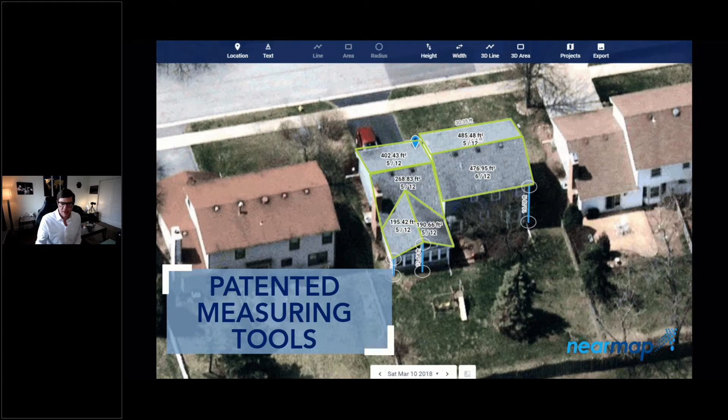Okay, so let's start looking at some content here. So we've got our 2.2-inch ortho imagery, our 3-inch obliques, and then we've got our patented measuring tools on our obliques where you can get measurements accurate to within 6 inches. We've got our 3D textured mesh where you can do things like a viewshed analysis. You can also do emergency response and spatial analysis with that 3D.

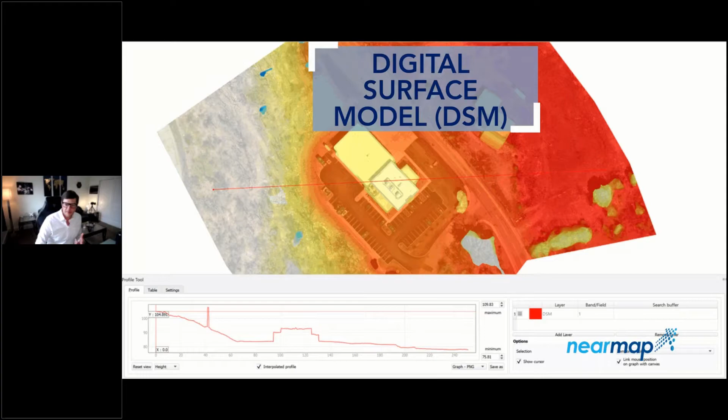And then we've got our digital surface model and our bare earth digital elevation model. And then all these products kind of come together into a great stack where you can do a lot of different analysis with it, including with the AI. And I'm going to go into a lot of that in great detail here coming up.

So really quickly, since we've been looking at a lot of slides, I'm going to show you a really brief video that kind of shows what our map browser interface is like. So this is our web-based mapping application where all of our customers have access to this, and it's a really lightweight application that people can come into if they're unfamiliar with imagery or GIS. They can come in and export images, do easy measurements, see historical imagery, overlay KML files and the like, and then also view our panorama and oblique imagery.

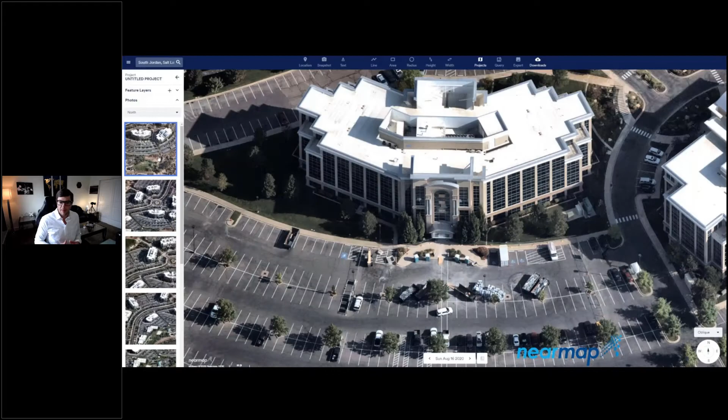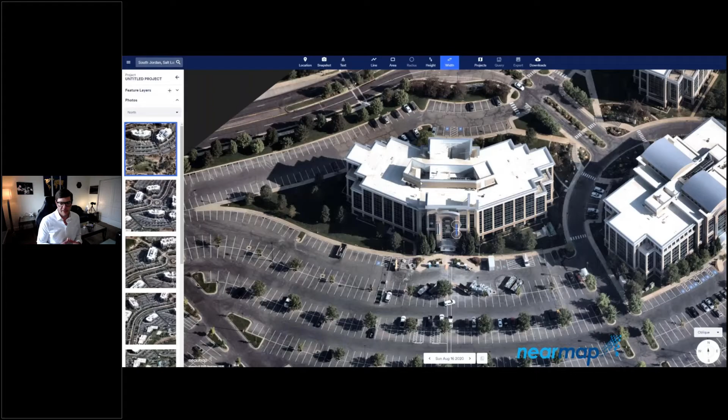And these are the obliques here. So we're switching between all the different images that our camera takes because it operates in a sweeping motion, taking images from 0, 15, 30, and 45 degrees. We make all those images available to the customer so that they can select from different images in the event that there's a tree blocking it or something.

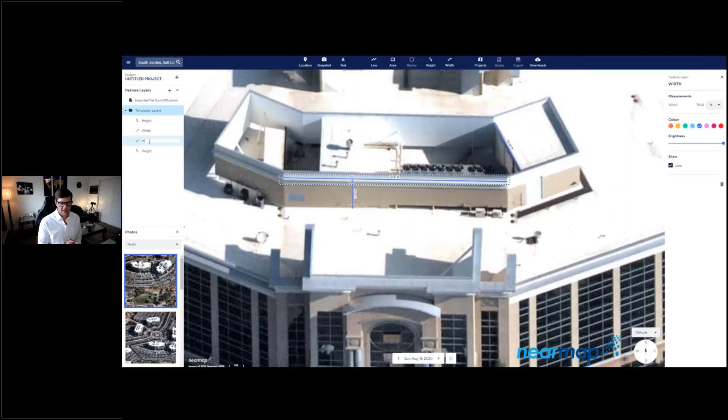You can kind of see around obstacles. And then you can see how close you can get into the imagery and the resolution on it. On the obliques, this is all 3-inch resolution. And these measurements are going to be accurate to within 6 inches on the obliques, and they'll be accurate to within 4.4 inches on the orthos. So very, very accurate imagery with a lot of functionality built into this.

And you've also got our 3D inside of here as well, but I'm not going to show much of that because we will touch on that in a live demo. But the real value of our imagery is when you can bring it into your applications and start using it in the environments that you're used to using it in.

So this is inside of ArcMap, as a lot of you are probably familiar with. We do have a custom timeline add-in right here. You can see that we're cycling between the different dates. And you can access the historical imagery through all of the Esri applications, and really in any application that supports WMS, which is most applications at this point. And our new WMS has the ability to geofence areas and provide historical imagery, as well as deliver the imagery in NAD83 state plane coordinate system.

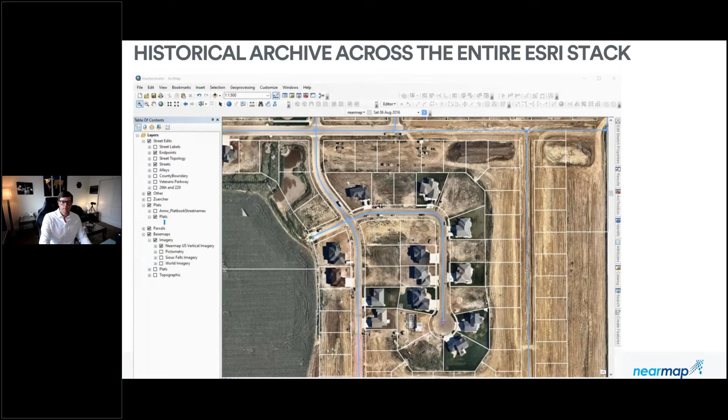We also integrate a lot of our other content with Esri, including our obliques. We have an oblique widget that we developed for Esri that's an add-on that you can put into your organization where you can access the measurable obliques inside a web app builder. This is a view of our ortho imagery inside a web app builder. This is a City of Sioux Falls public-facing application. It's another shot of City of Sioux Falls public-facing application. So we have the options for local governments to display our imagery to the public, and we also offer offline copies as well.

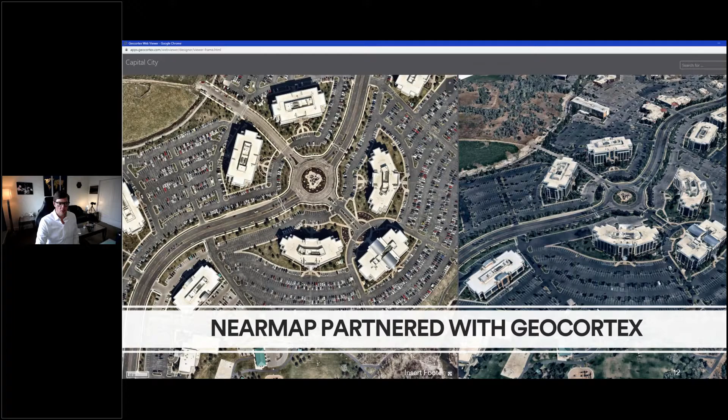This is our imagery 2D and 3D view inside of GeoCortex. So we partner with a lot of different vendors, and some of those are specific to local government, like CityWorks, GeoCortex, VUEWorks, and many others as well. So here's another shot of VUEWorks. This is another custom integration that we have with them. And again, this is Sioux Falls.

Now, we also have a partnership that we're doing with Esri for their ArcGIS Urban product. So cities that sign up for ArcGIS Urban have an option to also get some Nearmap 3D with that. And ArcGIS Urban is a great new tool for city planning and management where you can ingest 3D and a lot of your other data as well.

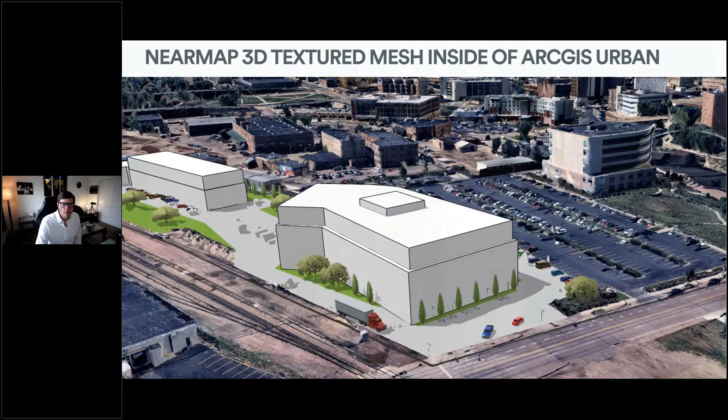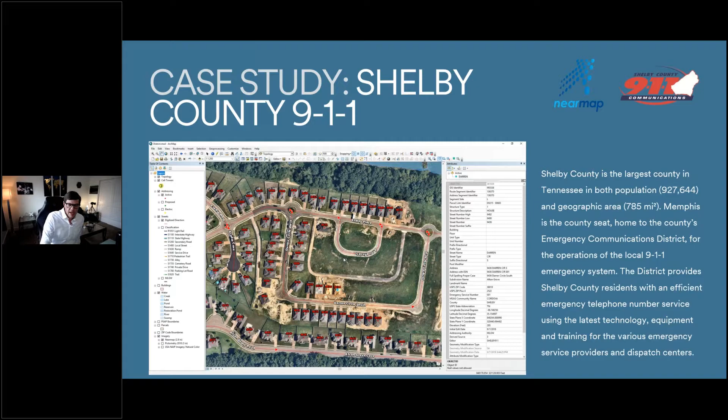Now let's go through a couple case studies really quickly. So Shelby County, they use our imagery for their 911 dispatch, and they're a fast-growing county. They had a lot of issues with their address database being up to date. So they didn't have the right geocoding in place for some of these new neighborhoods, and their imagery was really outdated. So with Nearmap imagery, they were able to actually geolocate all these properties and update their address database, making their dispatchers more effective.

And Timothy Zimmer, their GIS admin, he just really likes how it integrates into their whole product stack. You know, having the ability to integrate the imagery into the solutions that they're already using is one of the things that we hear most from customers as being one of the biggest selling points, is how it's so easy to set up and get it going inside of their systems.

Another good example of using our imagery at a very, very large scale is the city of Chicago. So they receive a lot of 911 calls every day, over 10,000, and all of those calls are routed with Nearmap imagery. So they stream our imagery through our WMS API, and you can see that on their screen right there. That's actually one of the city of Chicago's dispatchers.

The City of Boston Emergency Management is another one that uses our imagery a lot, including our 3D. They'll use it for things like the Boston Marathon planning. And in this example, they shared with us, they were able to get a lot of value from one of our recent flights last spring, right after COVID happened, to distribute COVID PPE.

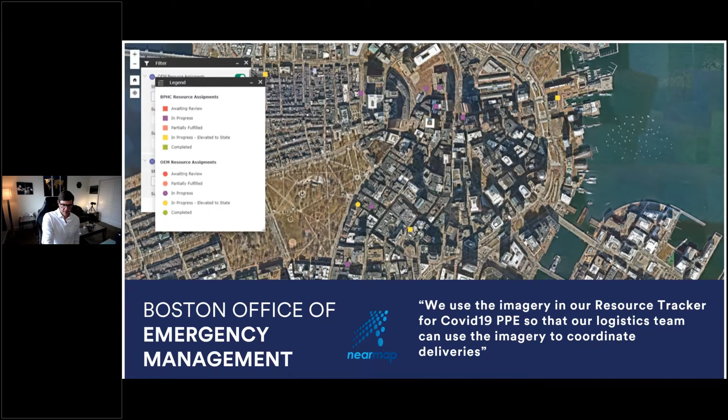And this is also City of Boston, so they integrate it with their Esri dashboards, and they have a live feed of our imagery with their traffic incidents and dispatch information. So integrating this inside of your dashboards gives you increased situational awareness, obviously. It also gives you access to more relevant detail and in more detail as well. A lot of the sources that people access for this type of application are low resolution and out of date. You know, having current imagery in an emergency response situation is quite critical.

We do have a lot of customer stories on our website. I'd encourage you guys to go check those out if you're interested in more. We have stories from local government to insurance and AEC, and a lot of areas in between.

All right, so now I want to show you guys an actual live demo of some of our stuff.

So let me pull up my browser here. So this is our Map Browser. Obviously, we've got Ford Field here, but I'll quickly just show you a few things that you did see in the video, but I'll just highlight again. You've got all the historical imagery over here. These are different forms of content here.

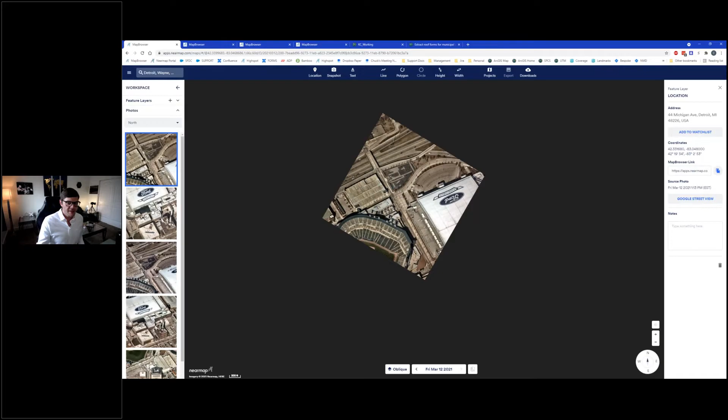So you've got vertical. Our panorama is a stitched together mosaic of our obliques. And the obliques are a single image frame. So you can see how it's oriented like this. Over here on the left, you can select from different images from those different angles like I was talking about. And measurements on these will be accurate to within 6 inches, as I said. But as you notice, it's just that single image chip.

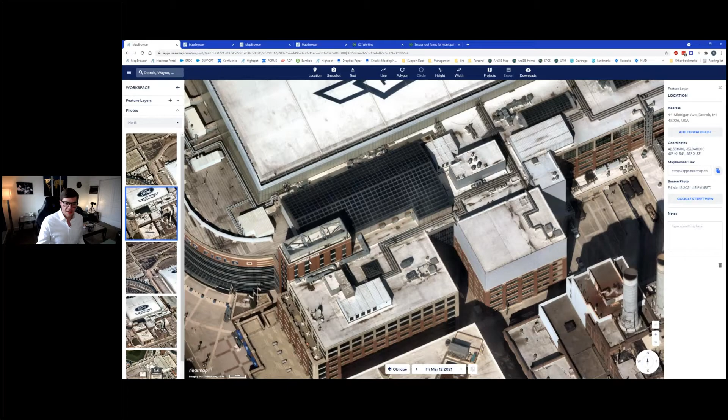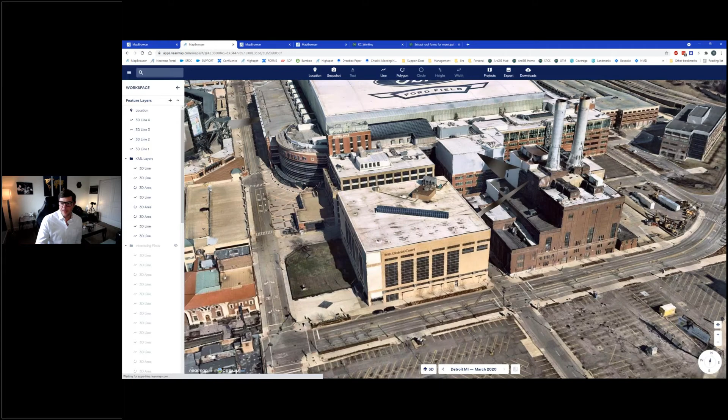So that's what our panorama does. It actually stitches together all those images into a seamless mosaic where you can pan around, zoom in, zoom out. Can't do measurements on this though, but that's what the obliques are for. We've also got 3D inside of here. So this is all streaming through Cesium tiles, and you can export this through Map Browser as well. It works really, really well. So we've got some, they seem pretty basic, but some really neat tools built in here.

So I'm gonna click on this line. You'll notice that on this smokestack building here, I've got a little cursor and it's conforming to the surface of that 3D. So I can really see where I'm at in space. And I'm gonna click on the street next to this building, and I'm gonna go up to the top of the smokestack. And I can tell when I'm at the top because I'm getting that visual confirmation.

And double click here. And now it's gonna give me the line length of 280 feet. But the relative height is 248. So we do the geometry for you to get the measurements off of those objects. You don't have to find the exact base, which is really nice. We also have area measurement tools in here as well.

Now, the next thing I want to show you guys, which is really exciting, is our artificial intelligence. So this is pretty new. We've been working on it for a few years. So it's difficult for me to say it's new because I've been excited about it for literally years, but now it's ready for prime time.

So we're in a very unique position where we can do artificial intelligence really, really well because we have a very large library of data and pixels, and those pixels are captured under various conditions in different countries and states and continents, different seasonality. So all that makes our algorithms much, much better. And all of it is also performed on just our imagery. So it's all performed on sub 3-inch resolution.

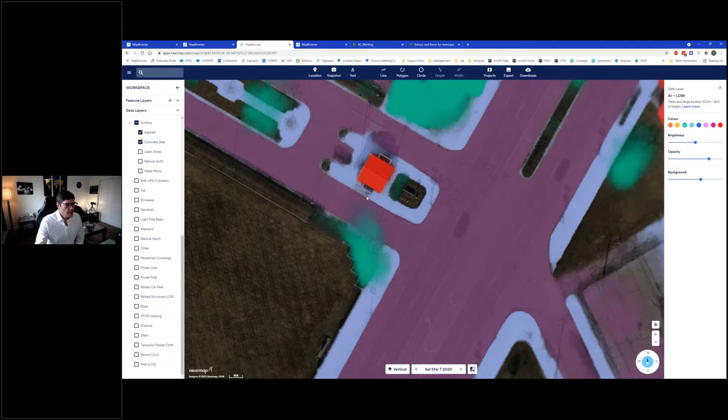And that consistent resolution also increases the accuracy of the results, because a lot of artificial intelligence is derived from multiple sources, like satellite, aerial imagery, drones. You've got a mixture of resolutions that you're looking at, which can really affect the results that come out of this.

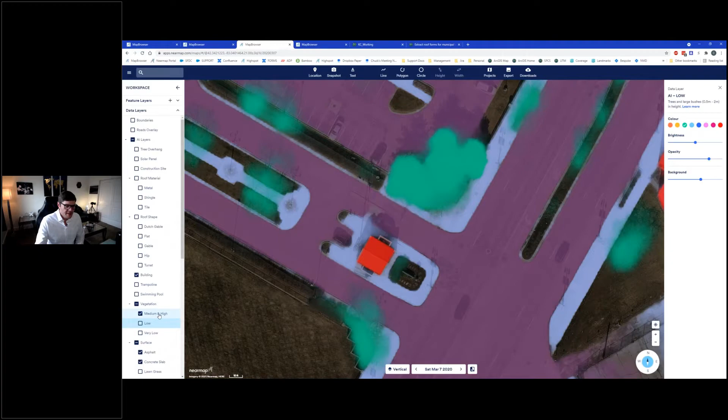Now, one thing that's really neat here I want to point out is this is the trees, so the high tree layer or high vegetation layer, which those are over here on the left. You can see we've got medium and high vegetation turned on. But what's interesting is this is a leaf off capture, and you can still see that these trees here still capture that whole canopy even though it's a leaf off.

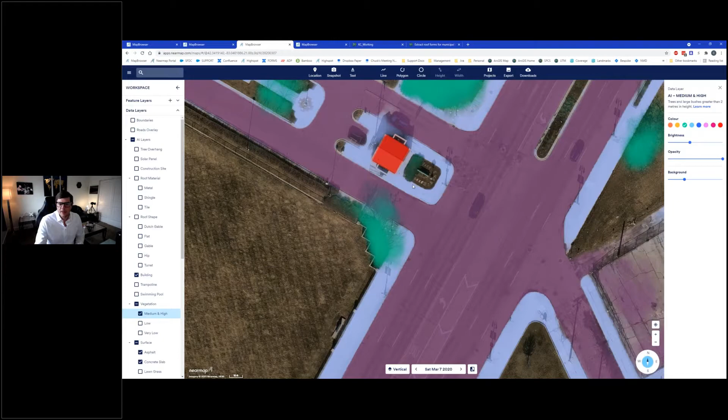So that's part of the wizardry that's built into our artificial intelligence. Since we capture a lot of these areas leaf on and leaf off, we have the ability to extract insights even when things aren't necessarily there. Now, one really great place is right next to this with all these interesting building outlines. So let's zoom in and look at how crisp some of these are.

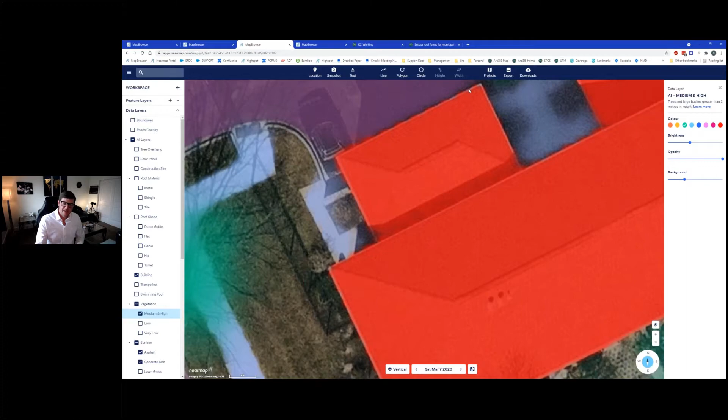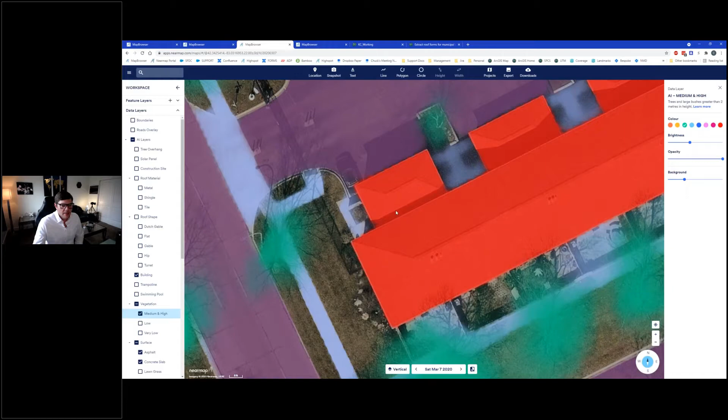So as we zoom in, you'll see that there's some transparency around these edges. And that transparency is indicative of our confidence. So we're very transparent about our confidence. So you can see how accurate those are. And then you can actually download a lot of this content and bring it into your GIS applications or whatever it is and extract some real insights from it. And it comes in a little bit different format as well. And I'll show some of that in a second.

But these are all of the layers that we have over here on the left. So you've got a lot of different options. Now, everything from tree overhang all the way down through these surfaces, these are all vectorized outputs. So we have these available in point, line, and polygon format. So you don't have to deal with a raster.

Now, the rest of these from LPG cylinders down, those are all in a beta phase, and it's not because of the quality, it's just because they're in a raster format. So we could deliver these as a GeoTIFF, but they wouldn't be vectorized yet. And this list just continues to grow and grow because, if there's something in the imagery that you're interested in and a human can consistently and accurately identify what that is, then we can train our bots to do that as well, which is really, really exciting.

So a lot of these have actually been requests from customers that we've started to train our models on, and eventually in a couple iterations of going through that, they'll be at a good enough quality where we'll start to vectorize them.

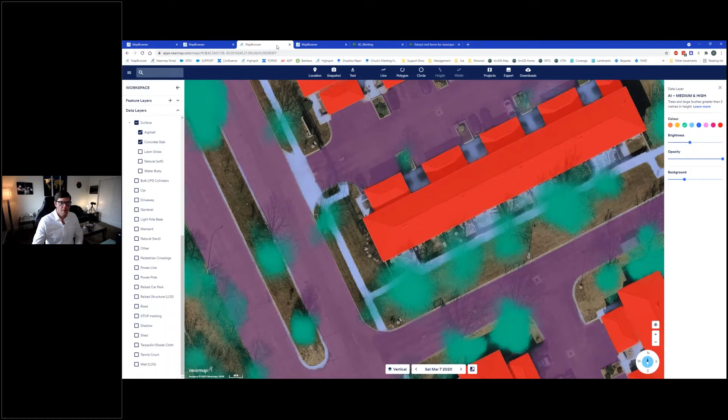Okay, last thing real quick, this is some of our beta stuff here. So this is power lines and power poles, and we actually vectorize the power poles as well. You can see we've got the ability to turn down the background, so you can really make some of these layers kind of pop out. And you can also change the symbology on them as well. So if I want to change the color of the lines, I could do that.

You see, all this is captured at a really, really large scale. And even the power poles, we pick those up really, really well. Even when there's occlusions from trees, or you've got blockage on it, we can pick up where the shadow is, and we also use that to identify where the base of the pole is. And now we're adding more information to these, identifying whether it's a power pole or a light pole, and there'll be a lot of other things coming in the future as well, which is really, really exciting.

So now I want to show back to the PowerPoint here. Actually, there's one last thing I want to show you, which was the ability to export, which is important. So we have all these different export options. All this is available through API as well. The imagery and the AI is available through an API now. The 3D is still download, but you have access to download a lot of different content here.

And like I could do 20 square miles at a time in the 3D, and I could either draw a polygon or just upload an area. And then we've got all the different coordinate systems, including different vertical datums in here. So you can do NAD 83 state plane US feet with NAVD 88 US feet, which is a pretty popular option for local government. Now this is what's really great, is that you can select a lot of different content.

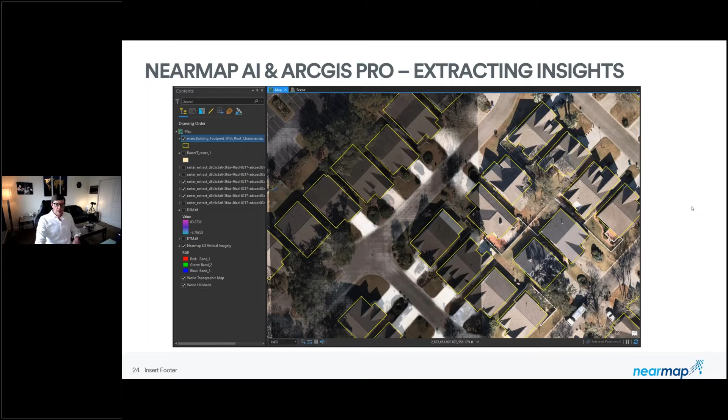So let's go back to our PowerPoint here. This is some of that vector AI that's extracted from Map Browser, and you can see how the building outlines are different than they appeared inside of Map Browser. That's because these are vectors, and we were displaying rasters in Map Browser so that we could show that transparency for our confidence. And here's some of those confidence levels as well.

So all this is in the attribute table. As I said, we're very transparent about our results. Also in this attribute table, if you were to scroll over, there's a link directly to Map Browser to the exact property and date that the results were derived from, so you can verify that without having to jump through hoops.

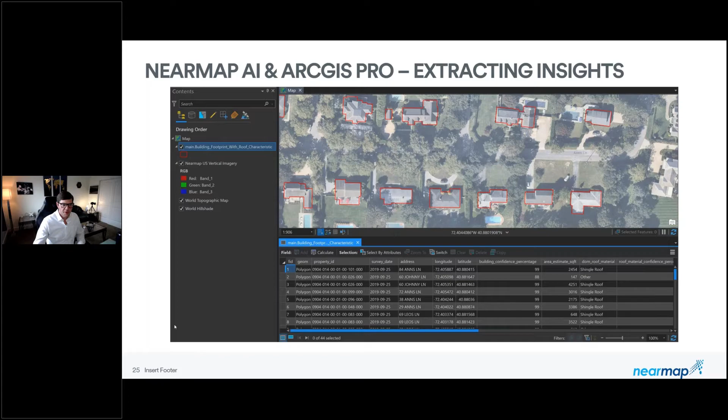And this is just another shot of what some of that AI looks like inside of ArcGIS Pro. Got some just really neat visualization tools that I like.

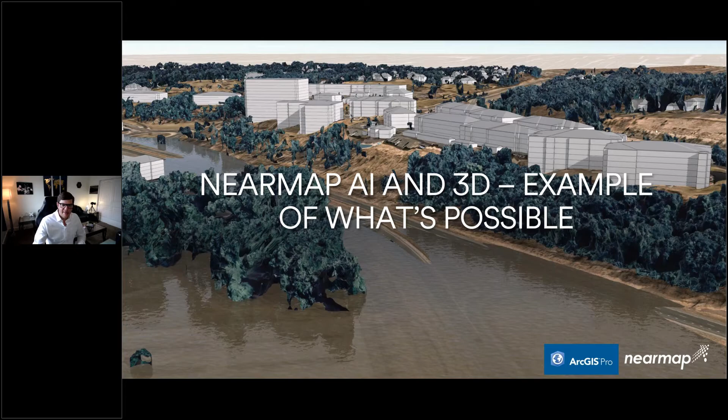All right, so now the fun stuff here, and we'll have plenty of time for questions here at the end of this. But this is some stuff that I've derived from our artificial intelligence, our digital surface model, digital elevation model, textured mesh, and point cloud. Not all from those products, but a mix-up of all those different ones. So let's see what's possible and how we got to this point. So this is our end state. So how did we get there?

So starting, these are the building outlines that come inside of ArcGIS Pro through the Living Atlas. This is the imagery that comes by default inside of Living Atlas through Esri. Now these are our building outlines overlaid on top of the ones that Esri has. Okay, now we've got our imagery overlaid on top of those. So that's our 2.2-inch ortho and then our building outlines.

Okay, so the next step is to load in the digital surface model, and then we've got basically that surface information from that roof. So now we've just got to extract it. And the way that we do that is bring in the elevation model as well, the bare earth, and then subtract the DEM from the DSM. And what we're left with is a normalized DSM. So that normalized DSM basically just shows everything that's above the surface, and it shows its surface heights accurately.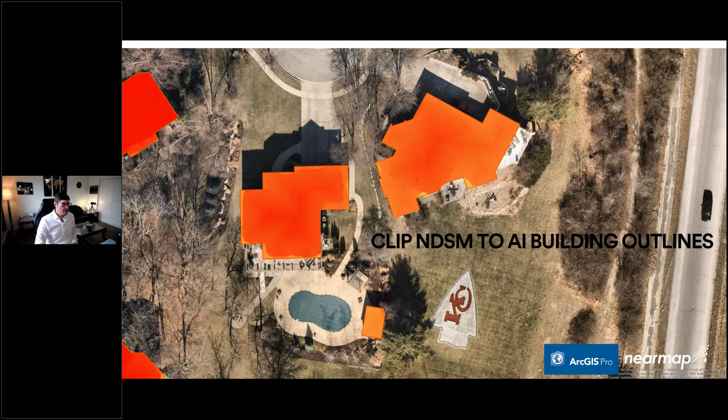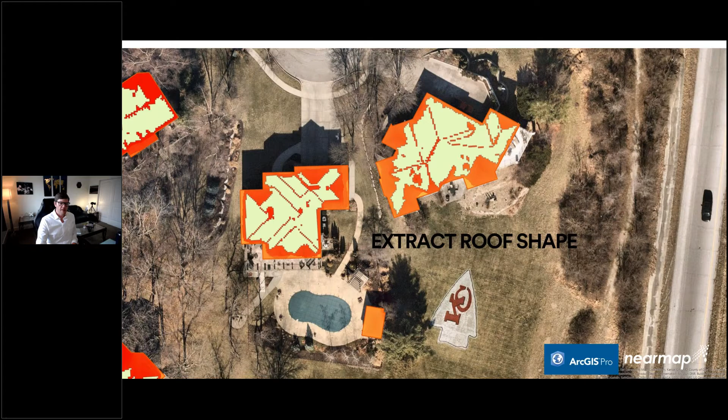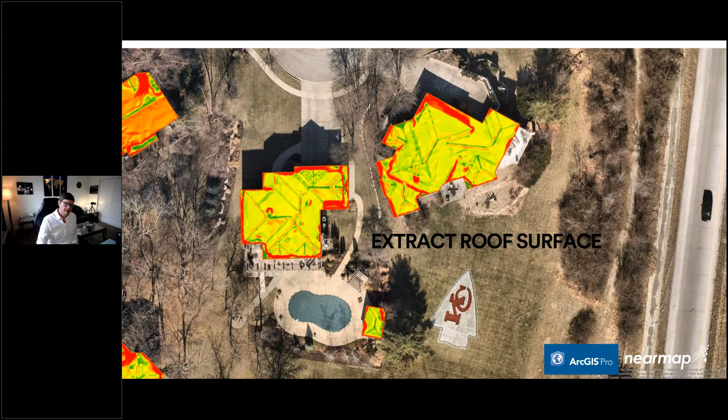So taking that normalized DSM, clip that to the AI building outline layer, and we're left with basically a DSM of the building itself. From there, you can run some tools to extract the roof shape, so like hip, gable, turret, flat, etc. Next step would be to extract the roof surface. So you're doing this using some raster functions and calculating that surface. And all these are saved as outputs that we'll use later to construct some of the content that I showed you at the beginning.

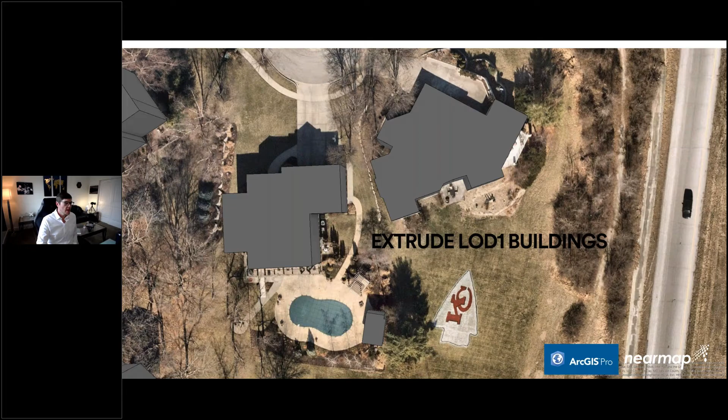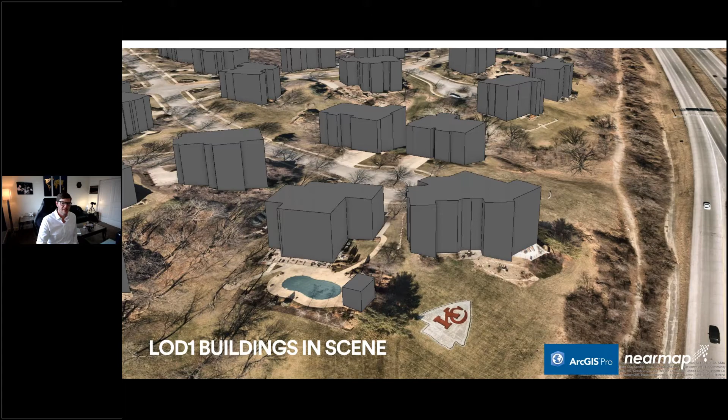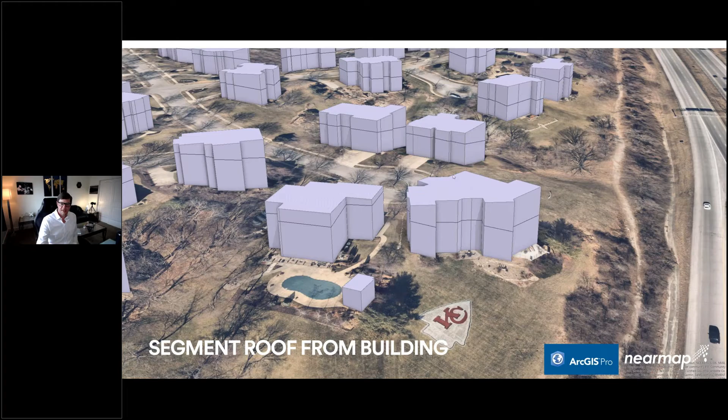So now we've extruded these LOD1 buildings. So these are basically just our building footprints extruded to the correct ground to peak height. But there's no roof shape. They're just a block. So that'd be an LOD1 type of scene. But then we can run some other tools to segment the roof into different parts. So we can figure out where the roof eave is. And you'll see that these kind of slope up and down. That's because they're on our digital terrain model, but it'll flatten this out. You'll see that it won't be sloped in the next step.

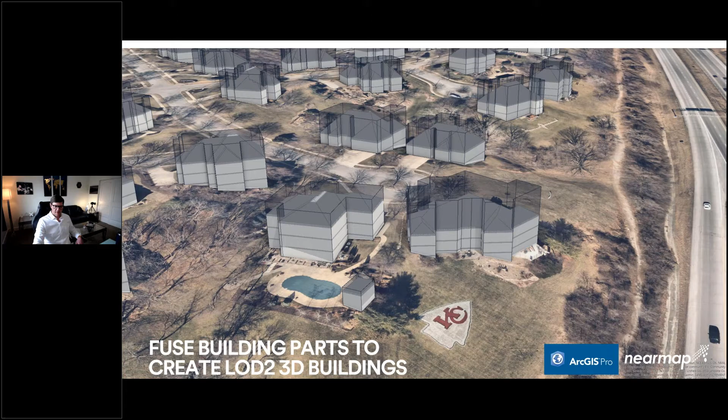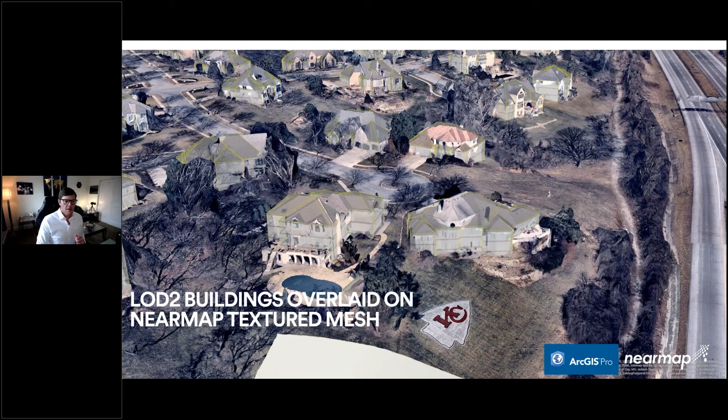But we also have a leaf on 3D capture. So I took our AI results for our high vegetation for our leaf off, overlaid those on top of a leaf on 3D capture, and then clipped it to that. And what we're left with is just the 3D textured mesh trees from a leaf on capture, but they're the same volume as what the leaf off trees actually are. So that's great for doing like line of sight analysis on a leaf off capture, you know, for signal propagation or even shadow analysis, things like that, wildfire analysis as well.

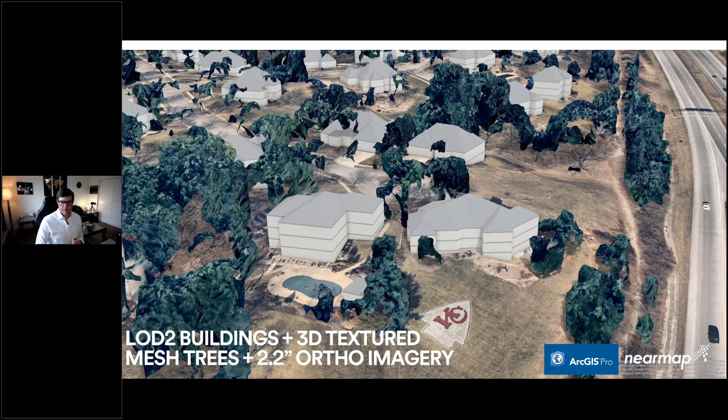Okay, and then basically taking out the textured mesh and just using the LOD2 buildings, the textured mesh trees, and that imagery now, because the imagery is higher resolution, so it's that 2.2 inch, so it comes through crisper. Now just labeling this with just a fraction of some of the attributes that are inside of the attribute table from these AI outputs. So we've got the building height in meters, the eave height, and that's from ground to eave. And then this is symbolized by a number of stories, which are interpolated. And then also labeling it with the roof form shape.

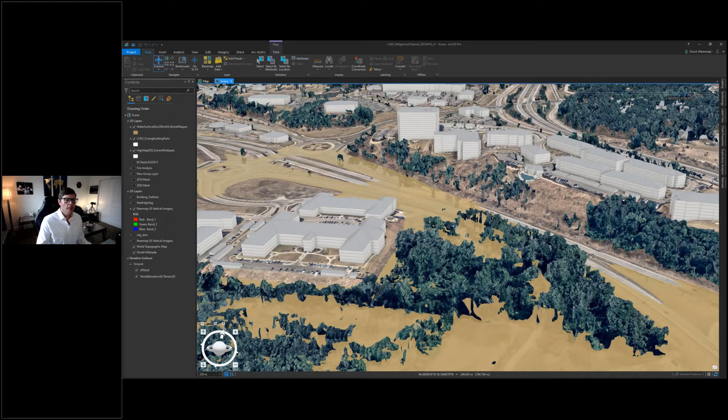Okay, and just really quick before we do our thank yous, just want to show you kind of the live version of this. This is inside of ArcGIS Pro. And that area that we were looking at, it's actually right over here. So you can see that it's actually a working model, and I'll just let it load here for a second. But this is all at a very large scale. So all of the buildings were done automatically at, again, very, very large scale.

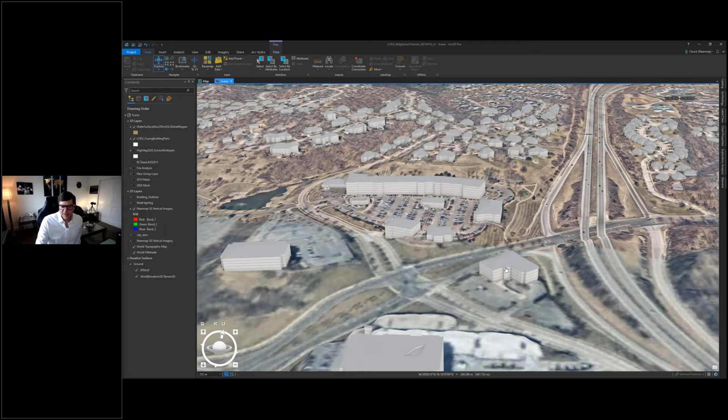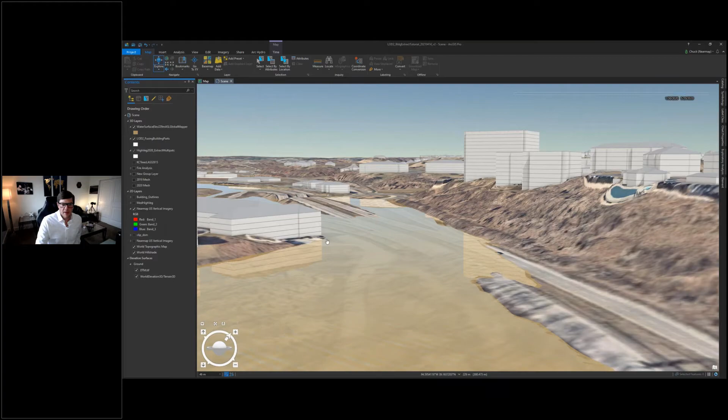And this one also has a flooding analysis in it as well. So if we zoom into some of these buildings, you can see we've got some animated water. Let that load. Works really great with our trees as well that we've extracted. So you can start to get insights on all the properties that are affected as well. So you can run an intersection analysis, which we've actually done here as well, but I won't show that. But yeah, these are great things you can do inside of ArcGIS Pro. This is not with any of our 3D turned on at all. This is just those 3D buildings.

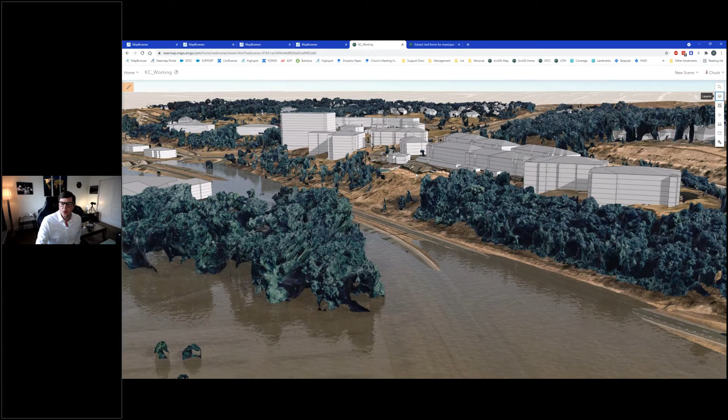And then uploaded that to ArcGIS Online. So now this is a streaming web scene that anybody can access. This one's not open to the public yet, but I will be publishing it to where anybody can access it. And yeah, so you could do those types of analysis and then bring them into applications like this. If you're doing it for, let's say an actual flood emergency response, you could whip this together, load it up into ArcGIS Online, and your people in the field wouldn't have to download anything. They could access this on their phones, their tablets, their laptops, and everybody can be on the same page and in communication with each other.